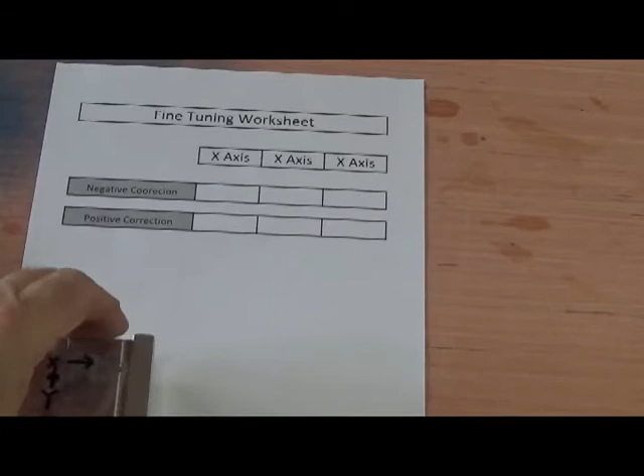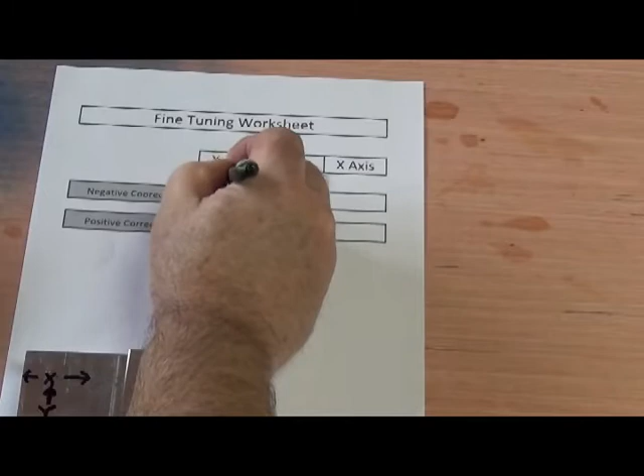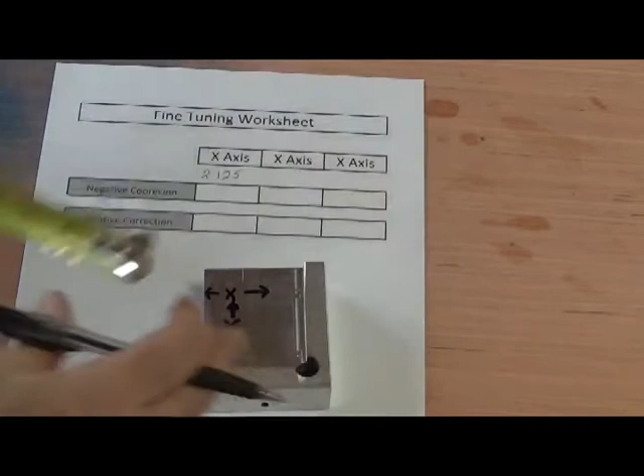But anyway, enough talk, let's get to it. What I didn't do, which I will correct, is I didn't put a box for the original measurements up here, so I'm just going to write them above that line. For the x-axis, I'm going to write down 2.125 inches. Now I'm going to measure the y-axis, and that is just short of 2.5 inches, so I'm going to make it 2.5.

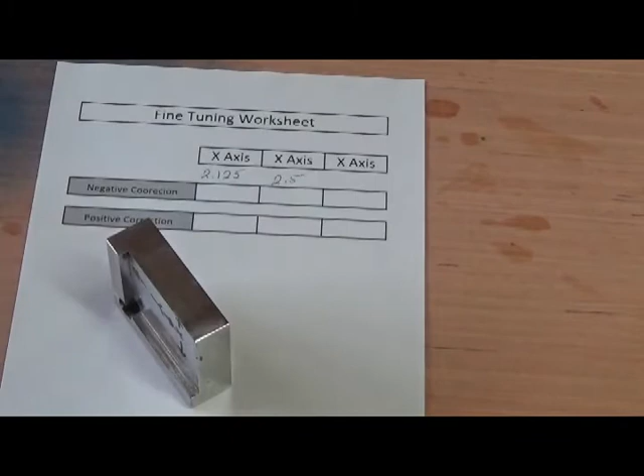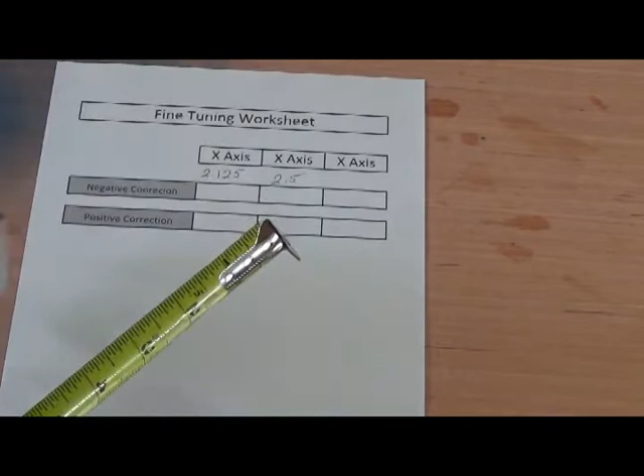And then the thickness of the touch plate, we'll measure that for the z-axis, and that shows to be almost 3/4. So let's go way off on that one. Let's make it 7/8 of an inch, so 0.875.

So we can tell right away that when we use these numbers to generate the G-code, it's going to give us a zeroing position that's nowhere near where we want it to be. But that's okay, because it gives us a starting point, and since we're using such primitive stuff like an old tape measure, the CNC machine will actually help us get down into the thousandths of an inch for corrections. So let's move over to the spreadsheet, put some of these numbers in, and then we'll zero the bit.

Okay, I've got the G-code generator spreadsheet open, as you can see, and what I'm going to do now is put in the X, Y, and Z axis measurements that we took with the tape measure just a moment ago. So for the Z axis we put down 0.875. For the X axis we put down 2.125. And for the Y axis we put down 2.5.

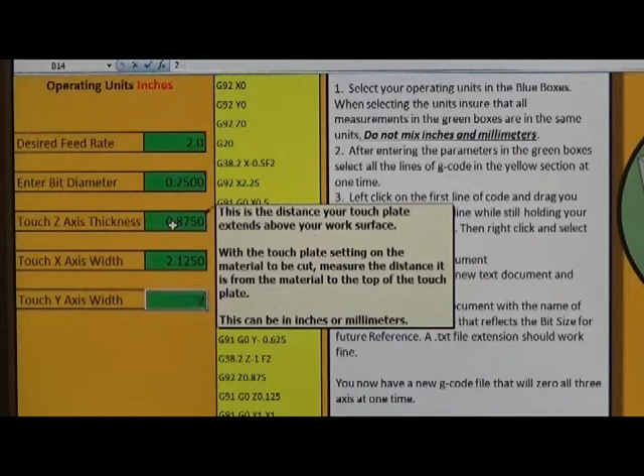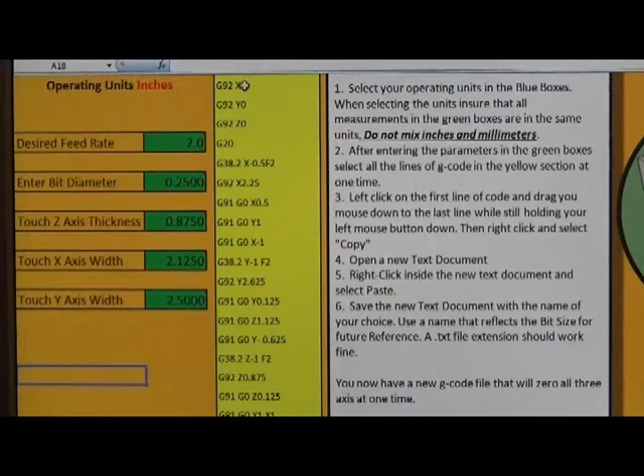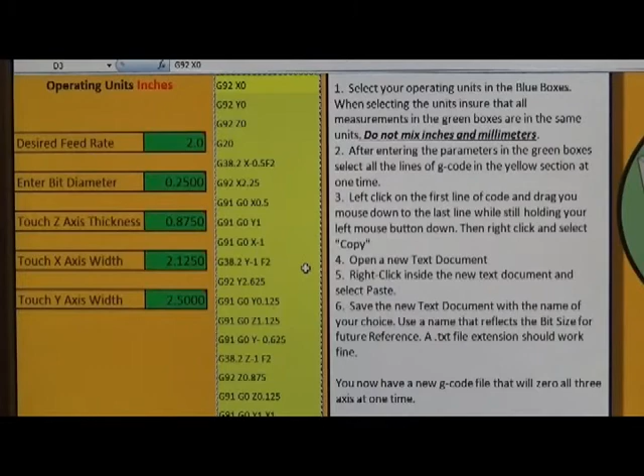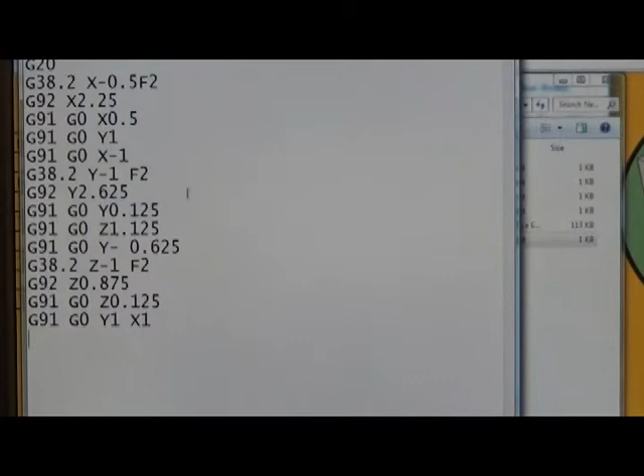Next, let me zoom out just a tad, I think maybe you can see it now. We're going to select all this G-code right over here in the yellow boxes that was generated, and we're going to copy that out. We'll select it all, right click, select copy, then go to our folder where we have the G-code stored. I've got a file called Fine Tune that I'm going to save that in, so I'll just double click that, select all of the original code, right click, paste it, then I can just exit and save.

So now we have a file saved for our first zeroing sequence, to fine tune this spreadsheet. I'll close that and switch over to where you can view the bit, and then we'll run it and see how close it is.

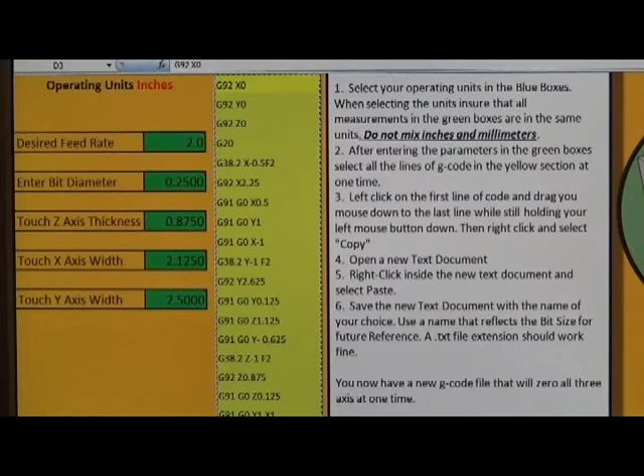Okay, I have everything set up on the machine down here. Now I'm going to go over to PicSender and load the test file that we just created. The file's loaded, so now I'm just going to send that to the machine and let it do its thing. I'll hold the touch plate still to make sure it doesn't move on me.

I'm using a feed rate of 2 inches per minute right here. You can go slower or faster if you like, but this is about the right speed. The only part that really seems to drag out is when it's coming down to touch the Z-axis, but that's okay because it goes slow enough and in small enough step sizes that it doesn't just slam into your touch plate and mess up your bit.

Okay, it's finished there, so I'm going to remove the touch plate and my ground wire. Now I'm just going to send this to 0,0,0 and we'll see where it winds up. So there's X0, Y0, and Z0.

Now, as I'm sure you can see here, it's quite a ways off. You may have already experienced this yourself, which is not uncommon. And that's because of differences in CNC machines.

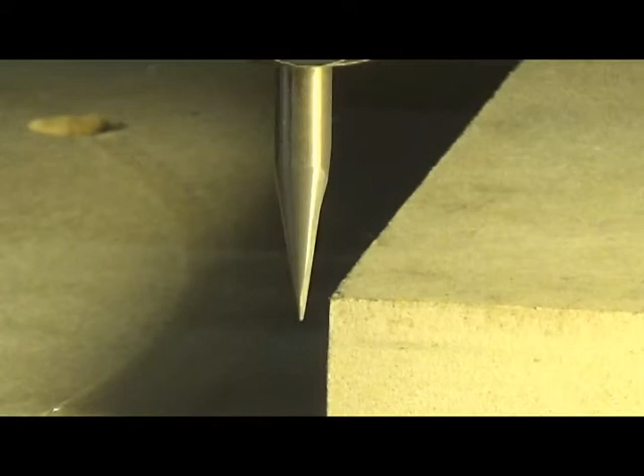So the first thing I'm going to do is raise the bit, because the tip of the bit is well below the surface of the material. I'll set my jog units to 1/10 of an inch and raise my Z up a couple of clicks.

Okay, I'm going to set my jog units for the X and Y axis to 0.01 inches. Now I'm going to start jogging to the right until I line up with the X-axis of the material. A little bit more. Actually, I think I've got it right there.

Okay, now we're going to go and move the Y-axis and get it to line up, and you're not going to be able to see that very well, but I think you probably believe me when I say I got it there.

Okay, we've got the X and the Y lined up. Now we have to take a reading, and I'm going to move the camera here so you can see where I'm getting these readings from.

Okay, we're back looking at the PicSender screen, and right up in this top right corner you can see the coordinates where the bit is located right now since it's been zeroed. This reflects the changes we made to get the X and Y axis to line up just right. As you can see here for the X axis, I've got a distance of 0.13.

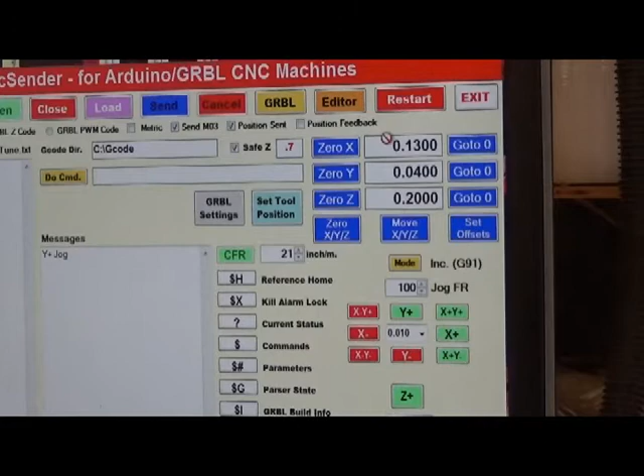So now we'll switch back over to the view of the bit, and we'll get the Z-axis correction. Okay, this is the exact same position the bit was in when we left it a minute ago.

Now that we've already recorded our corrections for the X and Y axis, I'm going to jog the bit a quarter of an inch into the material in both the X and Y directions. In PicSender I can do this in one step with their X plus, Y plus button. And there it is.

This is the last time you should ever have to use a slip of paper to zero your Z axis. But to get it right, or as close as we want, we have to do it this way one time. So I'm going to put the piece of paper underneath there, start lowering the bit, and switch my jog units to 0.01 inches.

I'm going to jog down until I trap the paper. Then I'm going to raise it up a little bit and start jogging down at 0.001. So we'll start going down at 0.01 now until we get it trapped. Oops, down a little too far. So I'm going to bring it up until it lets go. Okay, there we go, so we're free of it.

Now, so we get an even more accurate zero, I'm going to change my jog units to 0.001 inches and jog down until I trap it again. And there we have it. It's stuck in there, but it's not penetrating much. I can pull it out, maybe. Yeah, I can pull it out without tearing the paper, but once it's out, I cannot get it back in. So it's right down on the surface.

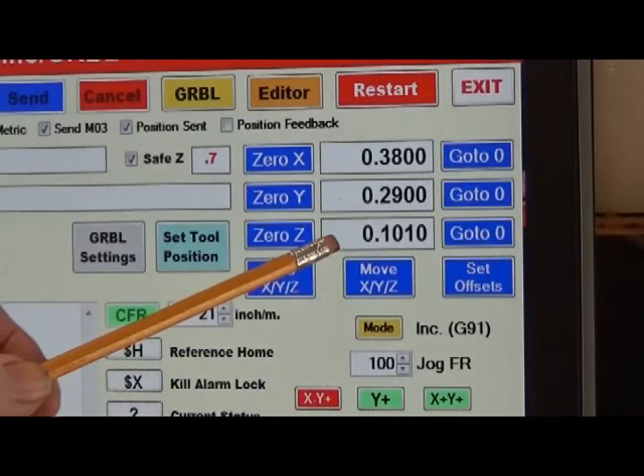Okay, so now we're going to go back to the computer screen view and see where we get that correction from. We're back looking at PicSender, and as you can see right here, for our Z-axis we have a correction of 0.1010. So I'm going to write that down on our worksheet here: 0.1010, and that's a positive correction.

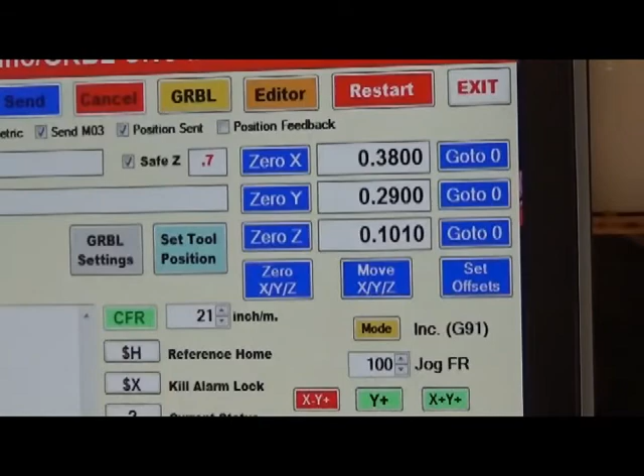Again, I'll see if I can get you to see this sheet of paper here now that I've got everything written on it. You'll notice that the columns at the top, I corrected that — they did say all X's. Anyway, on this bottom row right here, you can see where I've put in our positive correction.

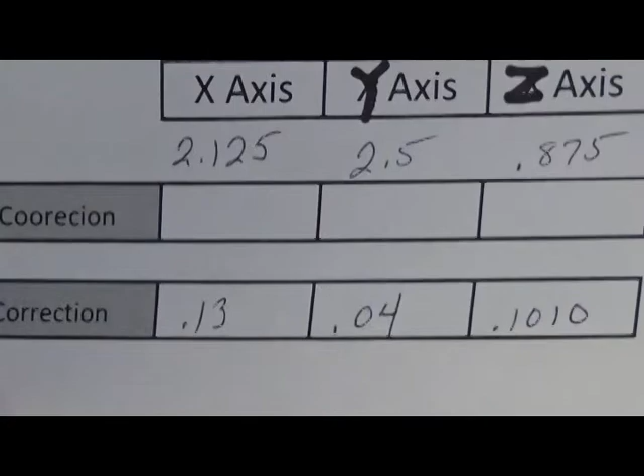So now we're going to transfer over to the G-code generator worksheet, enter these corrections, and generate some new G-code, and we will be done. So let me open that sheet up.

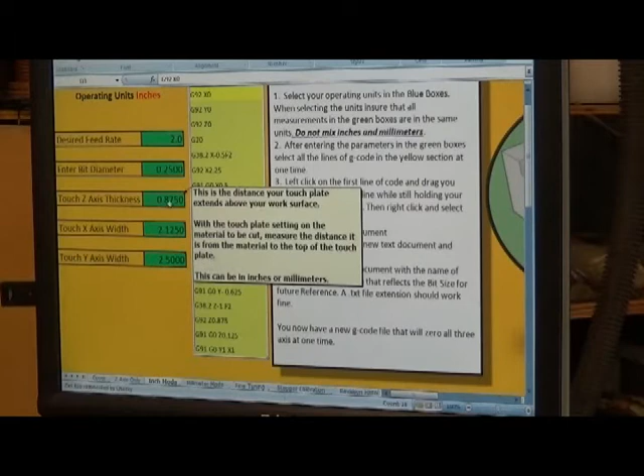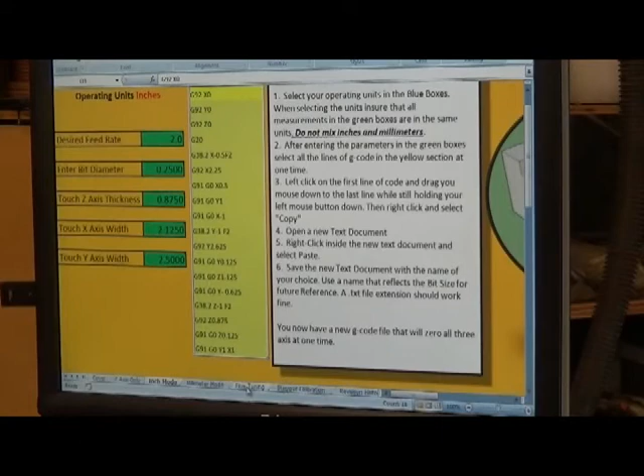Okay, back on the G-code generator spreadsheet, we're on the inch mode page, and you'll notice right here we still have all these original measurements that we took using the tape measure, which gave us such a horrible zeroing. So now we're going to correct that, and if you look at the bottom of the page, all the tabs, you'll see a tab that says fine tuning. Click on that.

Once you get there, underneath the blue box where it says inch mode fine tuning, that's where we're going to work. If you're working with millimeters, it'll all be the same, but your measurements will come from the millimeter page, not the inch page. Right now it says current measurement for the X is 2.125, which is what we measured the X-axis at. The Y is 2.5, which again is where we measured the Y-axis, and the Z at 0.875, which is where we measured that axis. All of those using that high-tech tape measure I have.

So then we ran the G-code to zero the bit, and then we made some adjustments. On this sheet of paper that we've got up here, we have the adjustments. Over here on the left we have negative correction and positive correction. We want to use positive correction because all those numbers that we took from PicSender were positive numbers, there were no negatives. If you had a negative correction, you would put it in the negative column. But you do not want to have a negative and a positive both in the same column — they'll cancel each other out.

Okay, so positive correction should be 0.13, and I've already got that put in here. Our negative, that's for the X-axis.

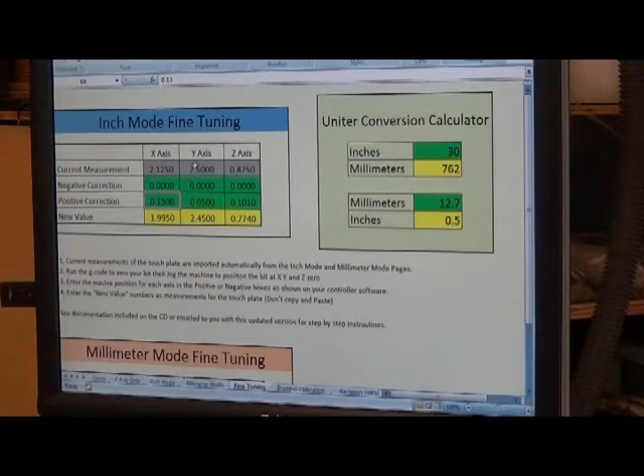For the Y-axis, our correction was 0.04, so I'll put that in, 0.04. And for the Z-axis, it's 0.1010, and I think I already had that in there. So that's fine. Now then, in the yellow boxes down here it says new value. These are going to be the new measurements for our touch plate.

So we're going to start with the X-axis, choose the new value, and it's probably best if you just write them down so you don't have to bounce back and forth. So I'm going to do that, and I'll make a column for writing those down on this worksheet before I upload it. But for the X-axis, our new value is 1.995. For the Y-axis, it's 2.46, and for the Z, it's 0.7740.

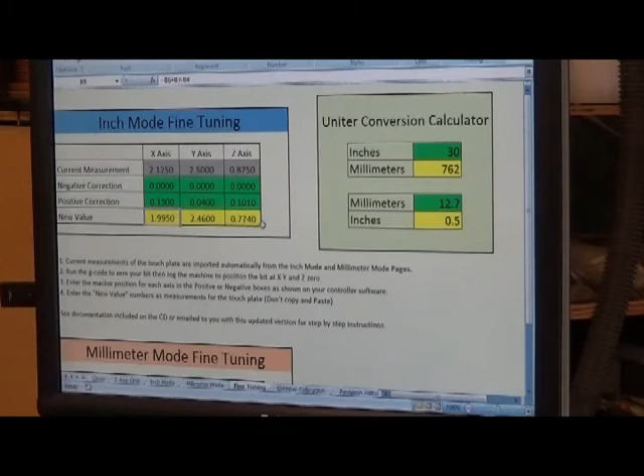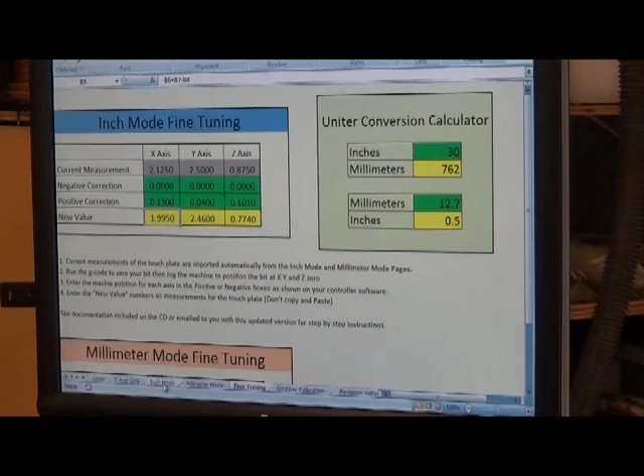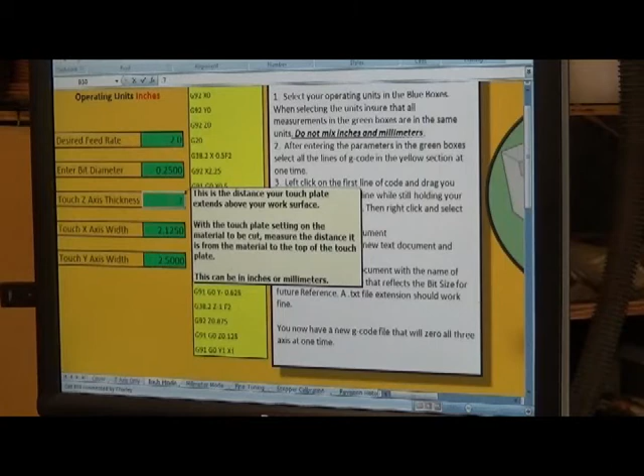So once we have these new values, and like I say, you don't want to right click and copy, because those cells contain formulas and you'll be copying the formula and you won't get the right result. So once you've just written those numbers down, go back to your inch mode page, and we'll start here with the Z-axis. The new value for the Z-axis we wrote down was 0.7740. The X-axis was 1.995, and the Y-axis was

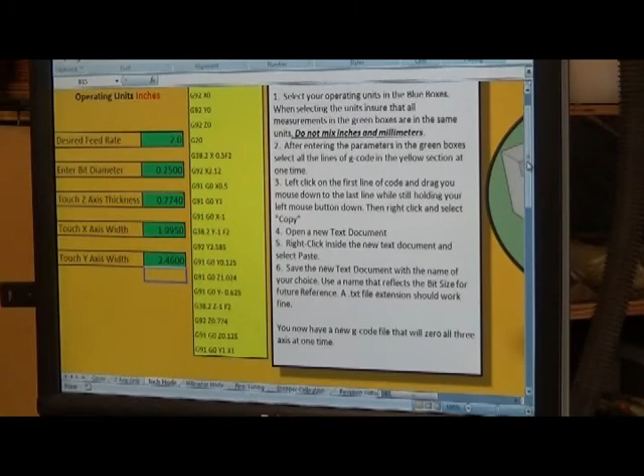2.46. Okay, once we've entered all those, you probably didn't see it happen, but the G-code in these yellow boxes actually changed because it updates on the fly. So every time you change one of these, they change automatically. So what we're going to do now is, just as we did before, left click, drag to the bottom, right click, choose copy, go to our File Explorer here, go to the folder where we have our G-code saved. There's our fine-tune folder that we just did, our file. So we'll select all that, right click, paste it, and then we can just click close, and we want to save the changes.

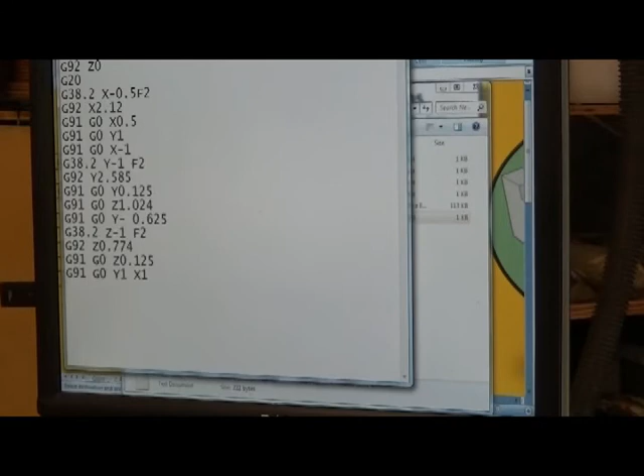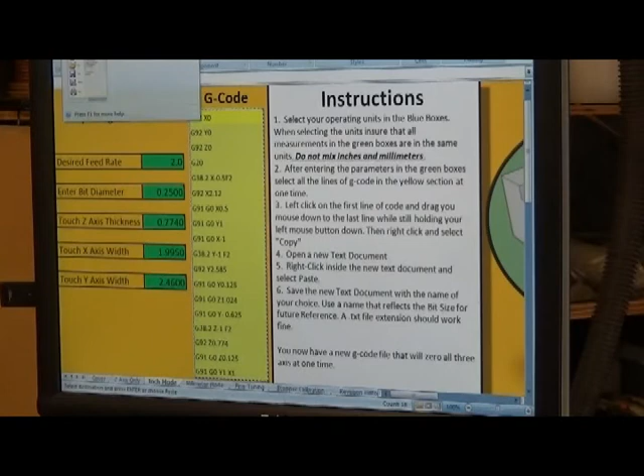Okay, so now we have a brand new G-code file, and also you want to go up here in your spreadsheet and save it. So just go over and click save. And the reason you want to save this is because these are the new measurements that are going to affect all of your bits. So after this works out, and we'll test it to make sure we zero correctly, and if it works out correctly, which I'm sure it will, then you'll want to recreate any G-code files that you already have since you've made an adjustment to the touch plate, and then you'll be more accurate with every bit that you have. But you only have to do this one time unless you make changes to your machine that would affect travel. So anyway, save that. We got our G-code file saved.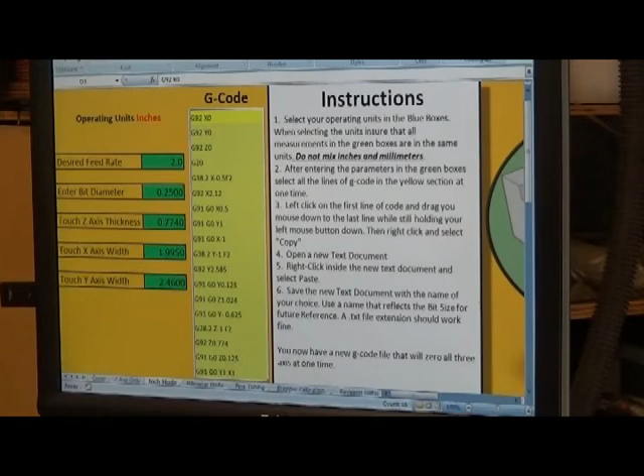So I'm going to go back to PicSender, and I'm going to click on load, and here's our fine-tune file that we just made. I'm going to open that, and now I'm going to transfer back down to the bit, and I'll reset that. We'll run that file and see how close we get. Okay, I've got the touch plate wired back up, the bit's in position. I've loaded the file that we just saved after we made the fine-tuning corrections, and I'm going to go ahead and send that file now, and we'll zero this bit out, send it back to zero, and see just how close we actually got.

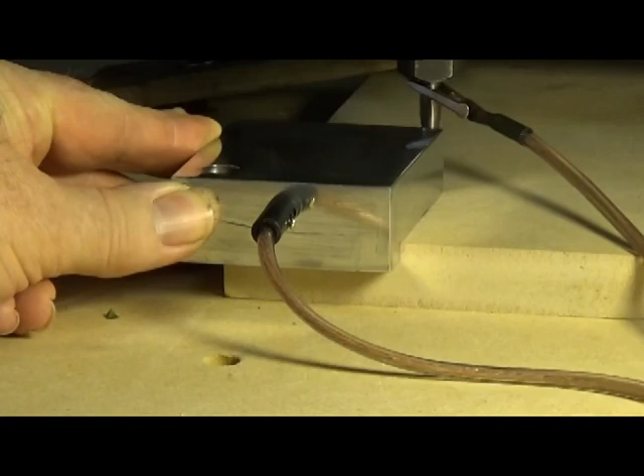Okay, let's move everything out of the way, and in PicSender I'm going to click on go to 0 for the X, go to 0 for the Y, and go to 0 for the Z. And let me zoom in real close here for you, and I think you'll agree that we got a really good zero this time. Yep, that's right on the money.

And that is how you fine-tune your spreadsheet to get a perfect zero, even though you don't have calipers or anything else. And this will affect every bit that you have now because you changed the settings in the spreadsheet. So be sure you recreate any files that you've already done for different bit sizes. And that's it.